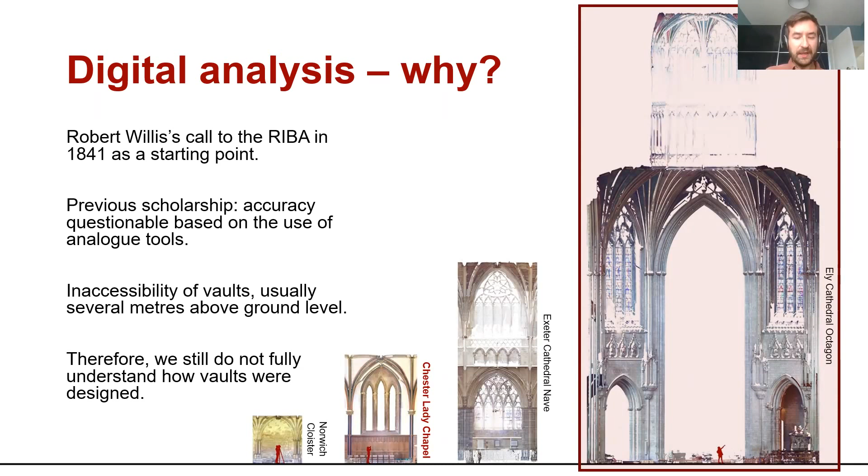So in short, 180 years after Robert Willis gave his speech to the RIBA, we still don't fully understand how medieval vaults were designed. But now we have highly accurate digital methods of surveying vaults, and digital modeling techniques to analyze them. We can hopefully find out a lot more than he did. I'll now hand over to Alex, who can give us a bit more background.

Thanks, Nick. So Chester, just to give you a bit more background about the cathedral. I'm sure some of you are very familiar with it, but we've got people from abroad who may not be. It starts off as an Anglo-Saxon church, refounded around the 1090s by Hugh I, Earl of Chester, as a Benedictine abbey, and rebuilt in the usual east to west sequence, with the west front apparently complete by around the 1160s. A few parts of this Norman building survive: the lower levels of the north transept and the northwest tower, and the west range of the cloister, which includes a groin-vaulted undercroft and a rib-vaulted abbot's passage.

From the mid-13th century, the monastic buildings in the east range of the cloister were rebuilt, including a new chapter house, which had lancet windows and tierceron vaults. Work then started on an extensive reconstruction of the church's east end, starting with the Lady Chapel, with windows and vaults very similar to those in the chapter house, but bar tracery in the piscina, the holy water vessel washing space, providing a dating after 1250. We don't get tracery before that date in this country.

The choir followed from around 1270, but construction was visibly prolonged. If you look at the cathedral, you can see how many changes are introduced and disrupted, and it's only described as being complete in 1332. Major 19th century restorations include the current wooden vault. In 1332, funding was obtained to rebuild the nave and the bell tower, but work didn't proceed beyond the east bays of the south aisle.

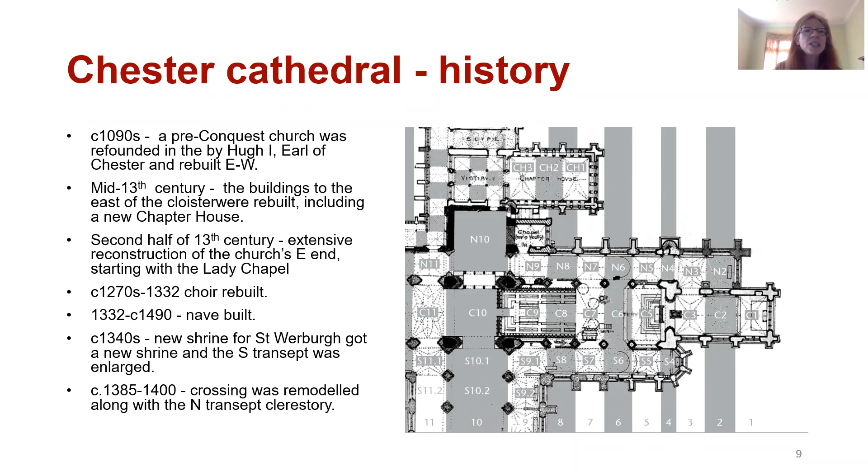Looking at this history, you can see there's a lot of complications, and we wanted to know what our data could add to understanding of the church. We had a number of research questions. The chapter house, the Lady Chapel, and the Slype all have vaults with similar plans, so we wanted to know whether they shared geometries in 2 or 3 dimensions. Then we wanted to know how the design of these vaults related to other 13th and 14th century vault designs.

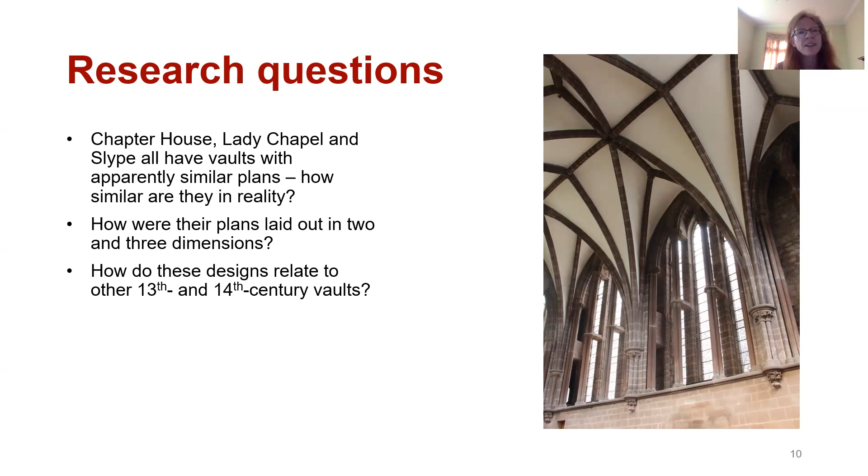But first of all, we needed to decide how we would capture the data we needed to answer these questions. I'll hand back to Nick for this part.

So we investigated 3 different methods of digitally surveying the vaults, and Chester really was a place for experimentation, being the first place that we visited.

So the first of the 3 that we looked at was total station. The way total station works is you look through a viewfinder, and guided by a laser, you pick a point in space that you want to capture, then you press the side of the device, and you have an XYZ coordinate in space. You repeat this process. So for us, tracing along rib intrados lines, we follow along with a laser and pick all those points out, and we end up with something like you see in the center here - a dot-to-dot version of the chapter house at Chester.

So the advantages of total station: it's precise and selective, i.e. you're only seeing the parts of these points that you decide to select. But this is also a disadvantage, because if you want to record other elements, for example rib profiles or the webbing, you need to do a separate campaign of recording. Another disadvantage is the scanning times are long - a bay at Chester took us nearly 2 hours.

Finally, the scans that we produce using total stations aren't in color, and they only show these individual points. So because of these limitations, we decided to abandon total station and look instead at full laser scanning.

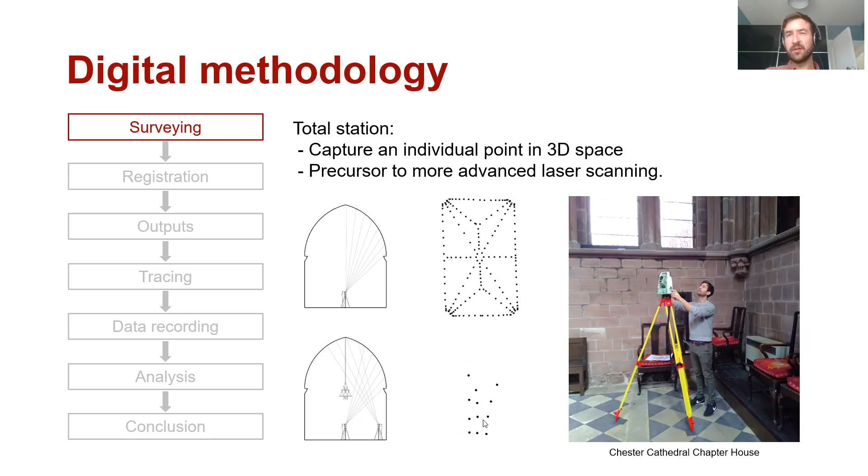But there is a third method that we investigated, which is called photogrammetry. The way photogrammetry works is you take hundreds of photos using a digital camera from as many different angles as possible to ensure that all different data and all details are captured.

So you can see this is JR, our technician. He's taking photographs for photogrammetry in the choir aisle at Wells. And if you look carefully at the bottom, he's being watched over by the cathedral cat.

Once you have all the photographs taken inside the cathedral, you put it into a piece of software called Agisoft Metashape. This can work out the perspective of where the images were taken from, and it figures out their position in three-dimensional space. What it results in is, again, a point cloud model.

This can also, like laser scanning, be exported as orthographic representations, as well as 3D point clouds and 3D mesh models. So what are the advantages of photogrammetry?

Well, it's inexpensive because you can do it with your own digital camera, or it could even be done using a smartphone in certain circumstances. And the software is only about £500. Also, you get some very high quality images out of it, and we'll talk more about that over the next few slides. Likewise, as a disadvantage, sometimes we found that the quality of the 3D data isn't as good as laser scanning. So we'll touch on that now.

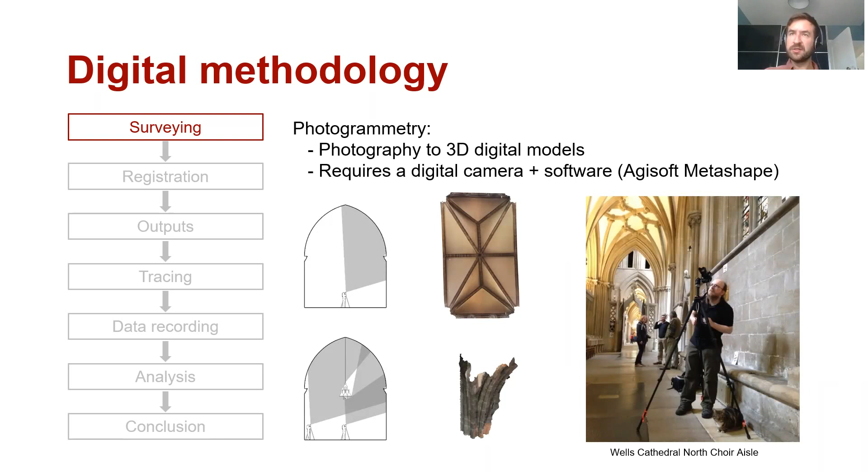Here you can see this is the photogrammetry version of it, and the quality of the image is beautiful.

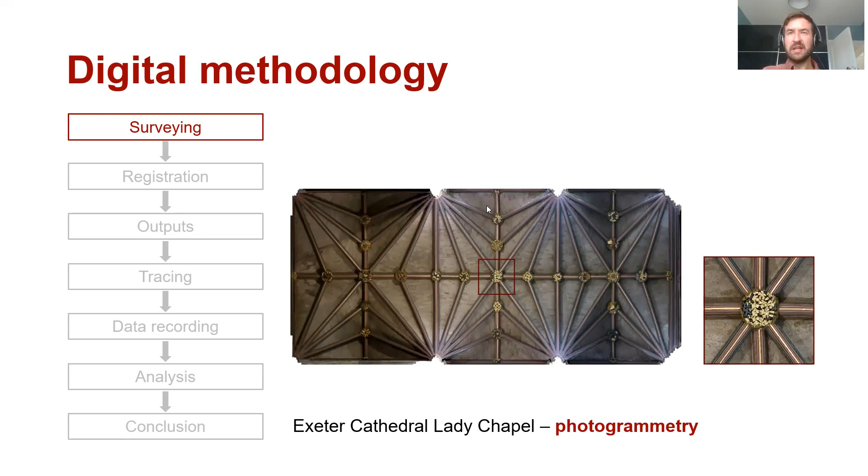It's much better if we flick back to the laser scan version. If we compare again, photogrammetry gives much better quality image, and the geometry looked good as well.

However, when we start to look at our areas of interest, which are predominantly the vaults high above us, we start to see some issues with photogrammetry. If we look at the top left two images, with the laser scan data, looking at the ribs high above us, if we take a cut through them, we still get a pretty good record of that rib profile. Whereas the quality really starts to deteriorate when we compare it with photogrammetry.

Therefore, moving forwards, we chose laser scanning as our primary method to survey all of our sites.

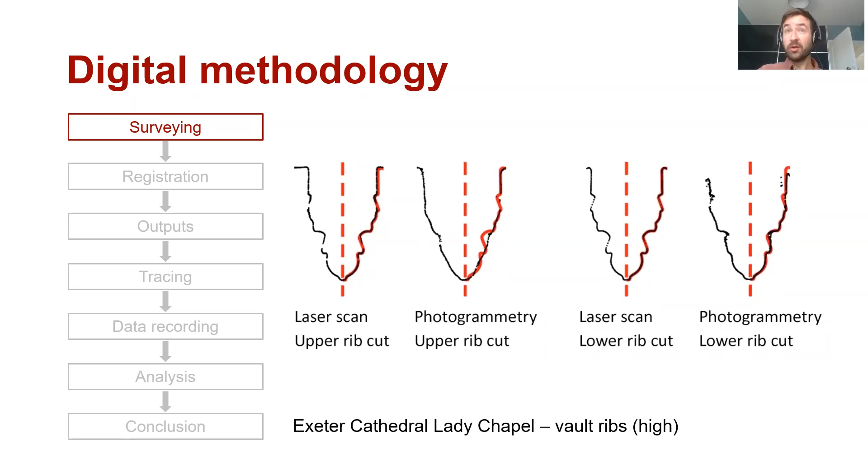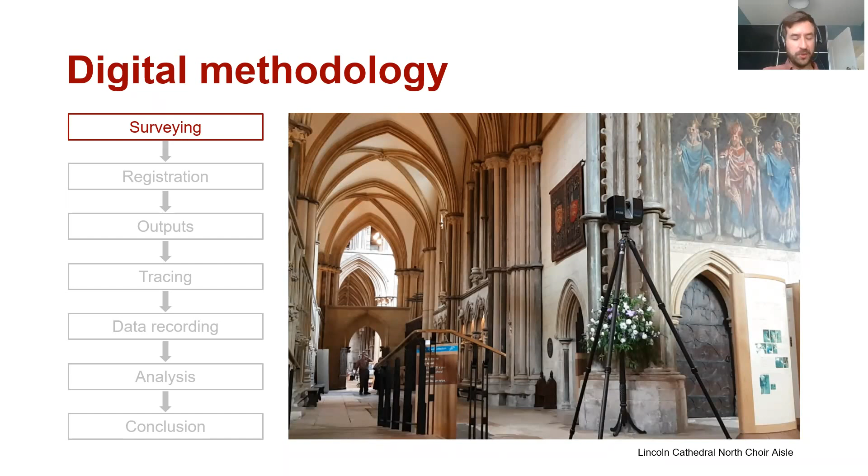Once we have those laser scans, we have to record more than one. I should have mentioned that previously: it works on line of sight. All of these methods - total station, photogrammetry, laser scanning - they all work on line of sight. So if the scanner cannot see the target, it will not record it. What we need to do is create a series of scans that overlap, and we tend to take one scan per bay for most sites.

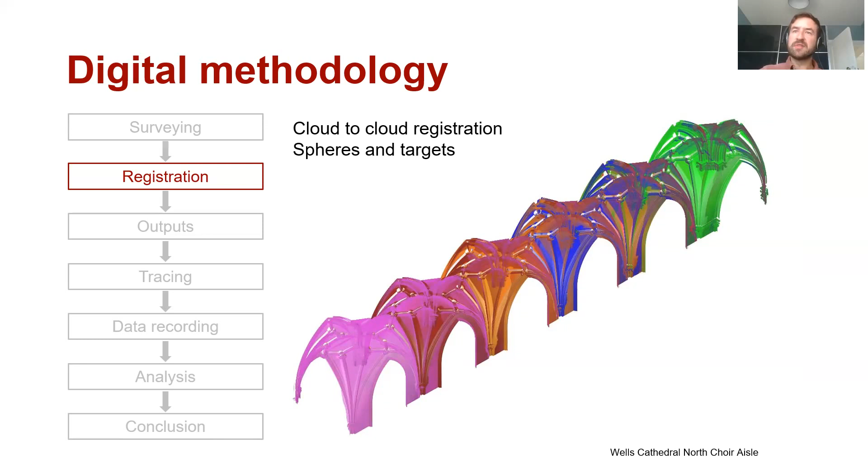We have to register the scans, which means we need to align them. When they come into the software, they could be anywhere in space. The way the software does that is it either looks for targets which we put up in church and cathedral interiors - these are either checkerboards or they look like giant ping pong balls. The software recognizes these and triangulates in three-dimensional space how the different scans align. More recently, with updates in the software, it can actually look at the different scans and recognize geometry amongst them and align automatically. So the software is getting better all the time.

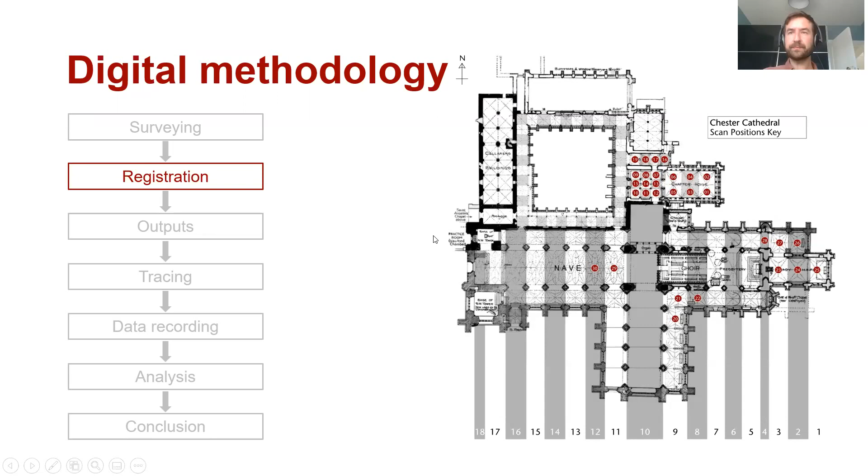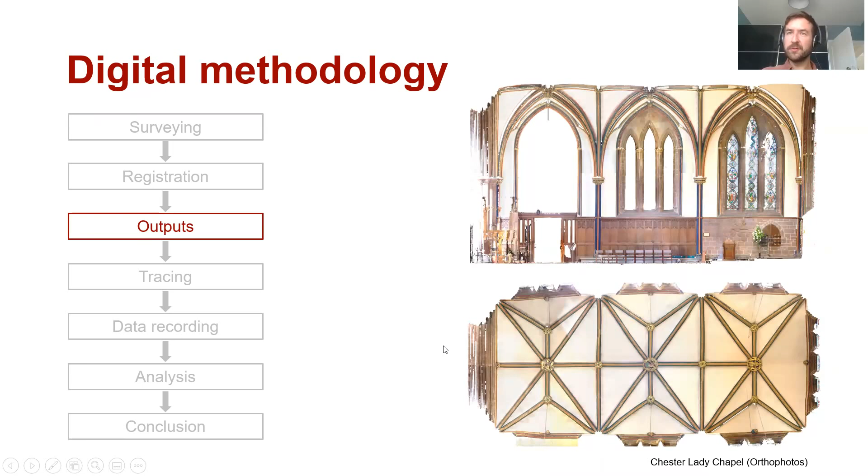So here are some of the outputs. This is a couple of ortho photos - ortho photos is where all of the perspective is removed from the image, so it's the equivalent of an architectural plan and section. We can start to interrogate this and work out what's going on with the geometry. If we look at the plan view of the Lady Chapel of Chester at the bottom, we get these snaking ribs - they're not going in a straight line, which was quite problematic for us. You can see the left-hand bay here, how much the walls are distorted and moving inwards. So we have ortho photos that allow us to start looking at what's going on.

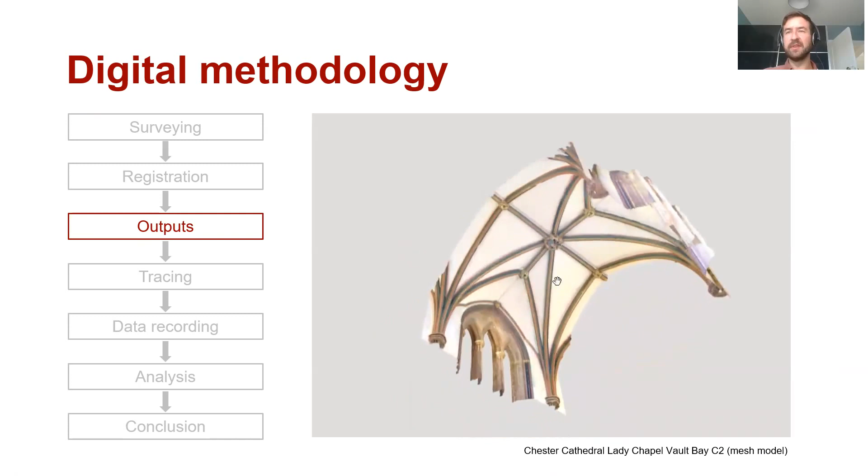And we have the 3D models. This is one of the mesh models, and we can start to then rotate and navigate around that to see what's going on. We'll just zoom in here so that you get a sense of how a mesh model works.

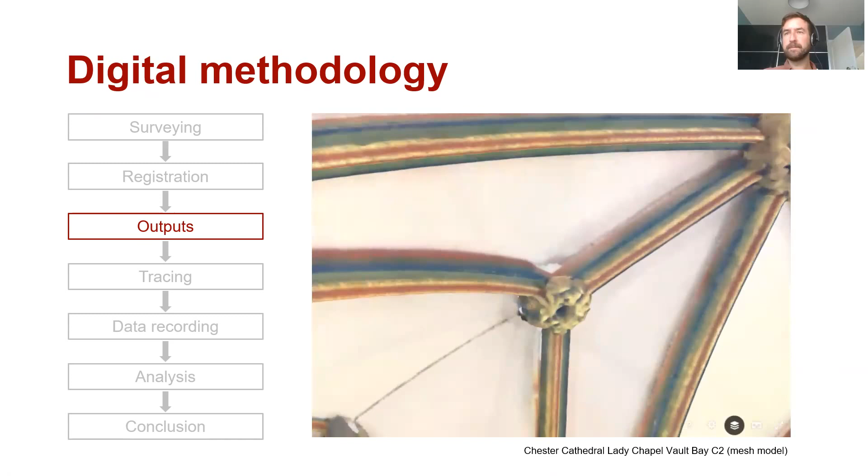So I'm just changing the view to show all the mesh. These are all the points of the point cloud which have been joined together to form triangles, and that gives us surfaces.

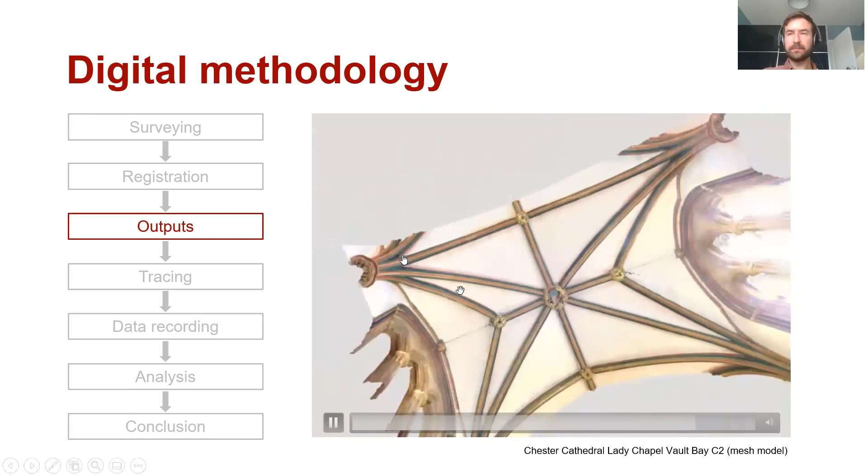Okay, so now we've got all of the data that we need to start with our tracing process. What we're primarily looking at is the intrados line of each vault rib. The intrados line is the innermost edge of the stonework. This is a really important point because you would have needed centering made out of timber.

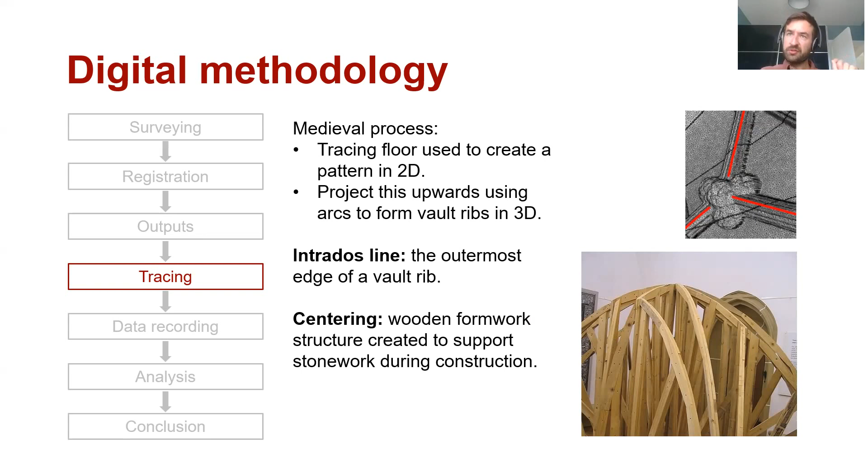You put that centering or formwork up when constructing the vault, and then over the top of that timber centering you can put in the stonework. Once it's all in place, you knock out the centering and hope that the stone above stays in place. So this would have been the critical junction where the timber and the stonework meet. In the stonework, it's what we call the intrados line, the outermost edge of the rib. So for us, it's really important that we trace along that to try and understand the geometry.

Here you can see this is an example of one of the choir aisles at Wells, and you can see where we've traced over all of those intrados lines on the 3D model in the center. From that, we can start to export some 2D views.

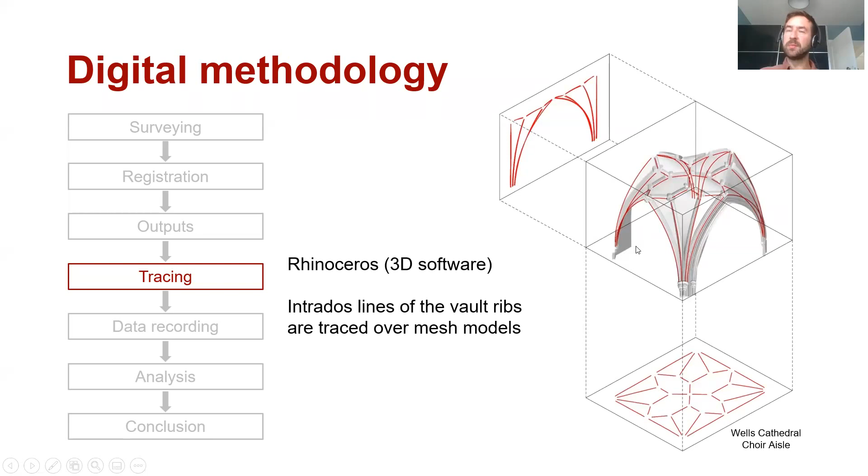But starting to get into the key geometry that we need to look at, we take the traced lines, which are not true geometry, because as I mentioned before, they tend to snake a little bit. So the first thing we do is run a best fit arc through that, and I'll explain further in the next video. But the key geometry we're looking at once we do have a best fit arc is firstly the impost line.

This is the point on which the springing point of a rib appears to rest, and it's usually the abacus of a capital in medieval vaults.

The next point is the apex, which is notional, because there tends to be a boss stone that covers it.

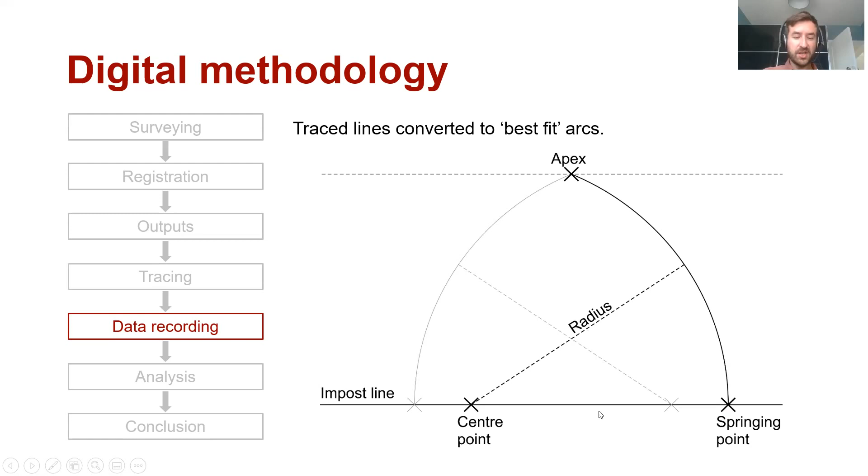Next, we need to look at the radius of each rib, and in some cases there are multiple radii for a single rib. Finally, we look at the center point of that arc in relation to the impost line. We'll repeat this in a few slides' time because it's quite fundamental.

I'll just finish this section by showing a video of us tracing over one of the ribs at the North Choir Aisle at Ely.

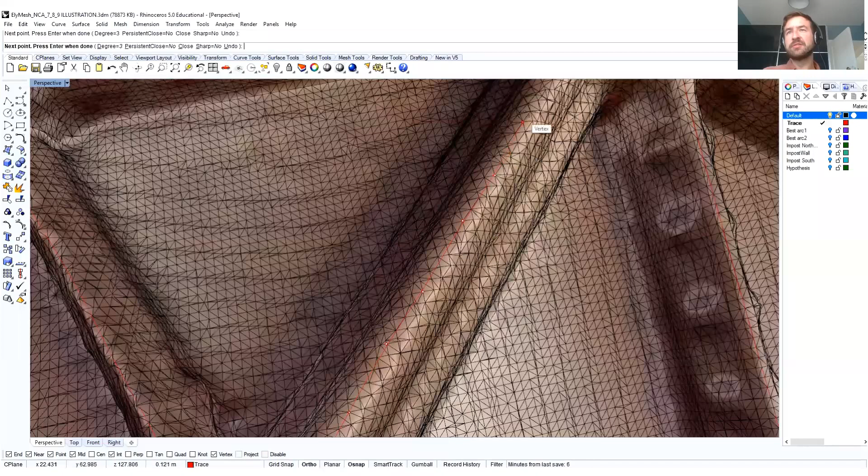This was a previous method we used and sometimes still have to use, where we're doing it by hand. We're going into the mesh model and trying to pick out the points along the intrados line. You can see that happening here.

More recently, we use an automated process where we can tell the software to create a section along that intrados line.

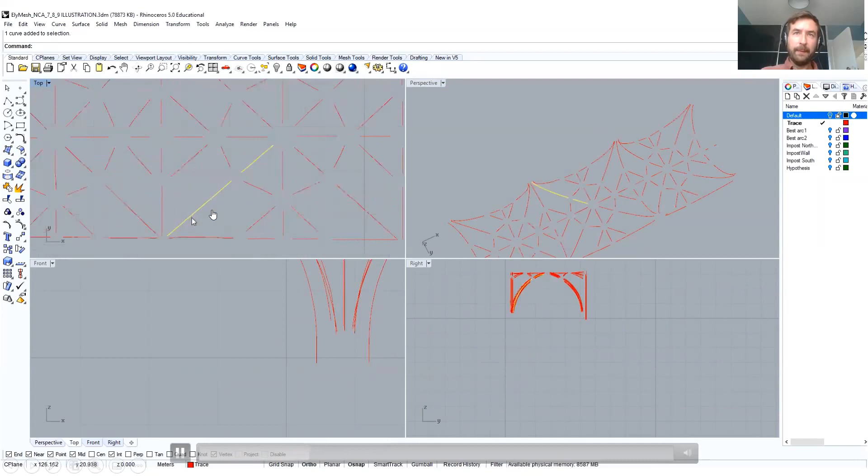So here you can see, Blue Peter moment, all the ones we've done previously—here's one I made earlier. But we can then start to pick out the individual ribs and we highlight them.

So I'm just asking the software to switch on the underlying points.

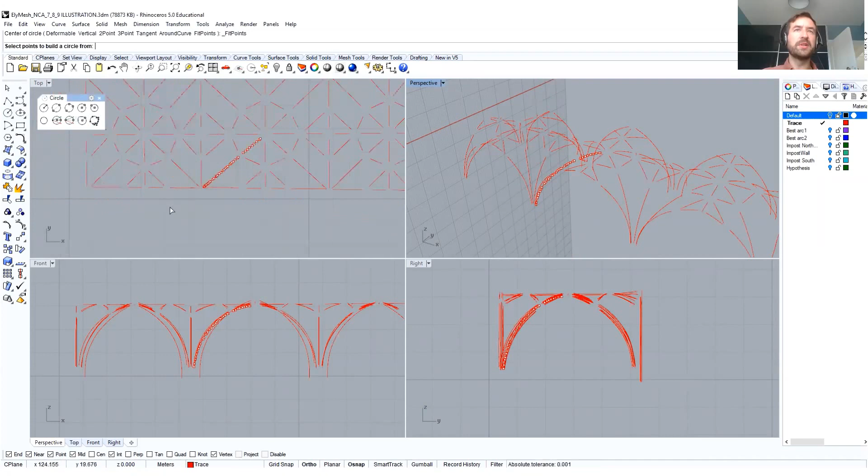And then we use one of the tools in the software, which is a circle fit through points, and it automatically creates that best fit arc through the traced lines. You can see that now shown as a purple circle.

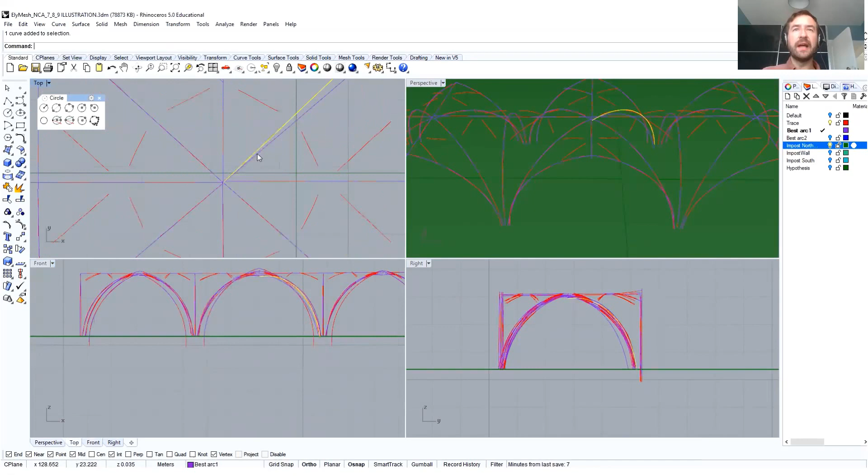So the next thing we need to do is tidy it up. The green line, which I'll now highlight in yellow, that's the impost line we spoke about before. We can trim that arc below the impost line, and then at the notional apex, we can start to trim that down too.

So now we have that best fit arc, and another Blue Peter moment: here are all the other ones that we've prepared.

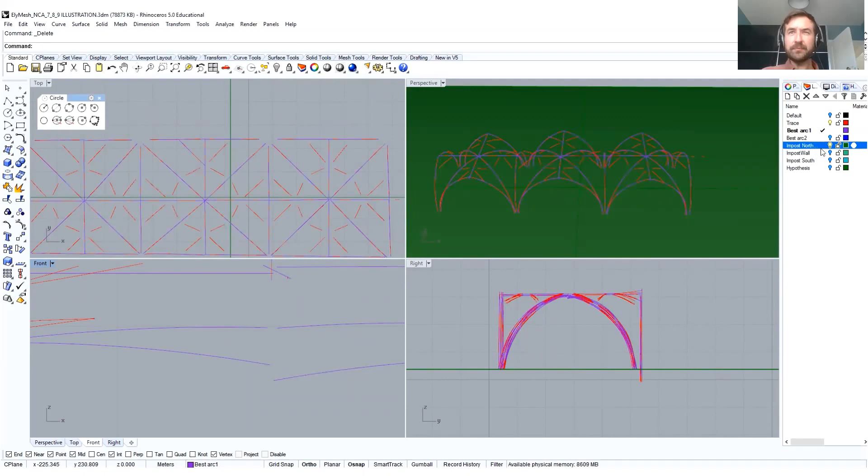We now have all the data we need to extract into a data table. The first thing we do is ask the software, what is the radius of this rib? It's about 3.5 meters. We then copy and paste that into our Excel spreadsheet.

In this spreadsheet we're recording every single rib, looking specifically at the radius, the apex height, and the center of the rib in relation to the impost line. Here you can see recording the center of the arc relative to the impost line - this one's quite far below, quite a rare occurrence.

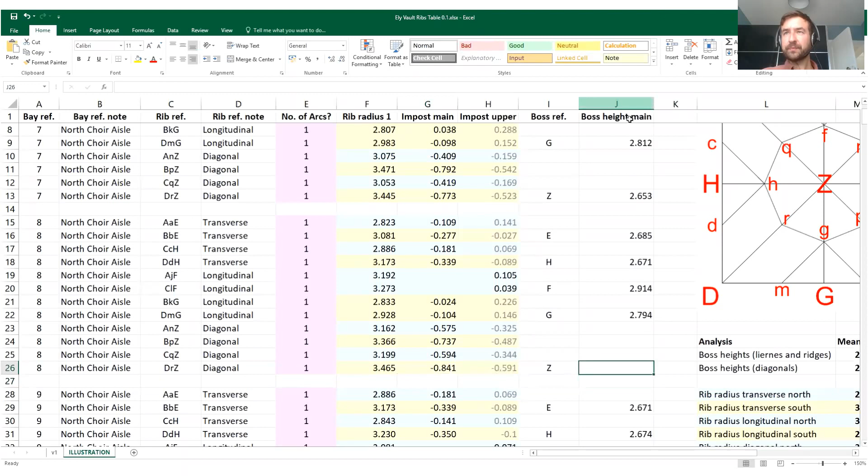So we put that into the table, and finally we go back in and find the missing notional apex. Hopefully that gives you an overview of the process we go through. Now I'll hand back to Alex, and she can tell us a little more about some of our analysis.

Thanks, Nick. But before we do that, let's look at the anatomy of a vault so we can all know what we're looking at. A Gothic vault has two main elements: the webs and the ribs.

The ribs are the mouldings, which usually mark changes in plane of the webs, but could also decorate planar surfaces. The ribs were built first as a framework, and the webs added afterwards, but both elements are equally important to the structure of the vault.

Medieval vaults are not like modern steel frameworks infilled with non-load-bearing panels. The starting point of a rib, as Nick said, is called the springing, and the top is called its apex. At the apex, where a rib meets another rib, there is usually a sculpted boss.

Architectural historians have given ribs different names based on their location. The wall ribs mark the junction with the wall, and transverse ribs span between the side walls, marking the division between bays. A bay is a compartment of vaulting.

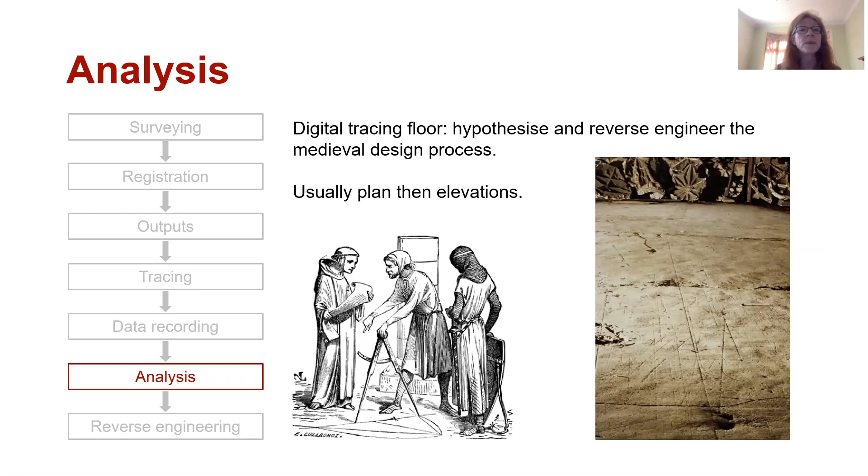From our data, we can create absolutely accurate 2-dimensional representations of the vault, from which we can start to hypothesize the process used to draw out the plan on the tracing floor.

We know that the drawing tools available to medieval designers were limited. The main tool was a set of dividers or compasses from which they could create curves. They also had squares for creating angles and straight edges for drawing straight lines. Therefore, any design process we suggest has to be possible using only these basic technologies.

In our workshop in 3 weeks' time, we'll show you in more detail how to use these basic tools to lay out a medieval vault. So what we're sharing today will just be a quick taster.

As a reminder, the chapter house at Chester was rebuilt in around 1240 to 1250.

It was part of the monastic buildings used for daily meetings of the monks, at which a chapter of the Rule of St. Benedict was read, hence the name chapter house.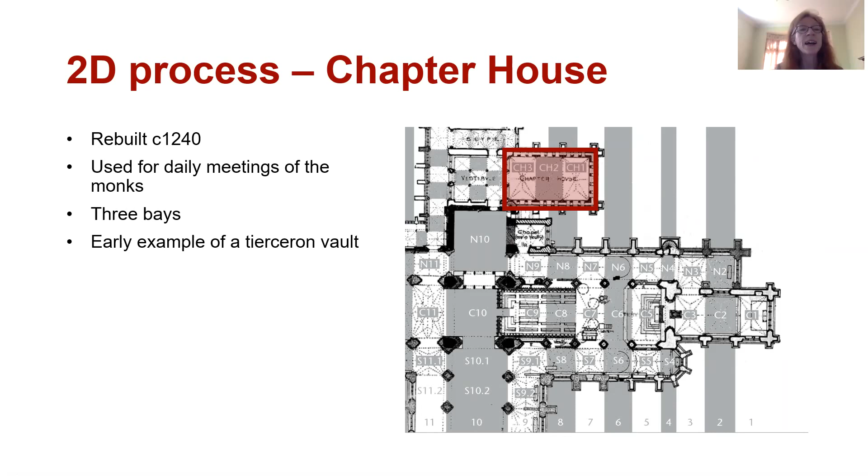Here's a plan of the building as an ortho photo, so you can see the 3 bays and the plan with diagonal ribs, ridge ribs, and tiercerons. And here's the overlay with our traced lines.

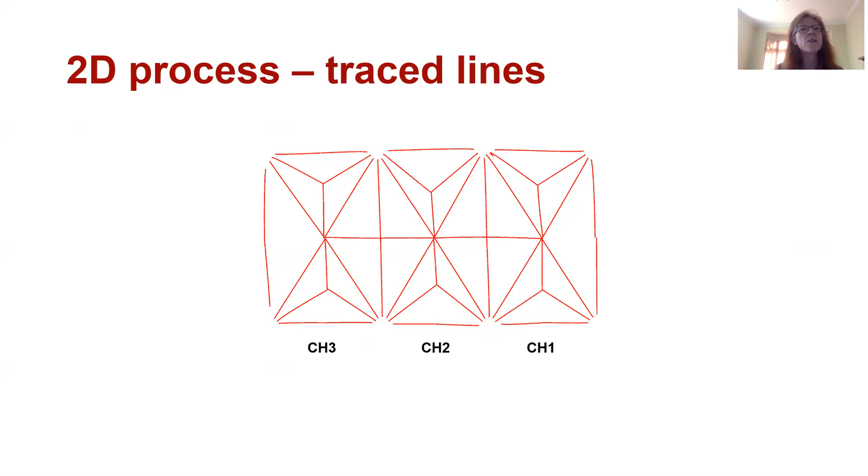As you can see from our wireframe plan, the construction of Chester was fairly rough, although we don't think the inconsistencies we found are the result of subsidence, rather that the building wasn't erected to exact standards of geometrical accuracy in the first place.

When planning a vault, the first stage was to lay out the plan of a single bay. This had already been erected when the vault was being built. At Chester, the central bay of the chapter house seems to have been laid out, as we'll talk through now.

First stage, laying out the bay. Then the diagonals were added. The next stage was to divide the bay into quarters, giving the location of the ridge ribs.

Creating chevrons in either direction creates what's been called the starcut, which our research has identified as a key design tool for medieval architects. We found the starcut in use at other sites.

Its benefit was that it enabled a design to be transferred between bays using proportions rather than measurements. This was vital because, as we've already explained in relation to Chester, medieval churches were rarely constructed to the same accuracy as our scans, so any design had to be sufficiently flexible to be applied to bays of slightly different sizes. In the absence of accurate numerical measuring devices, using proportions would have been much simpler.

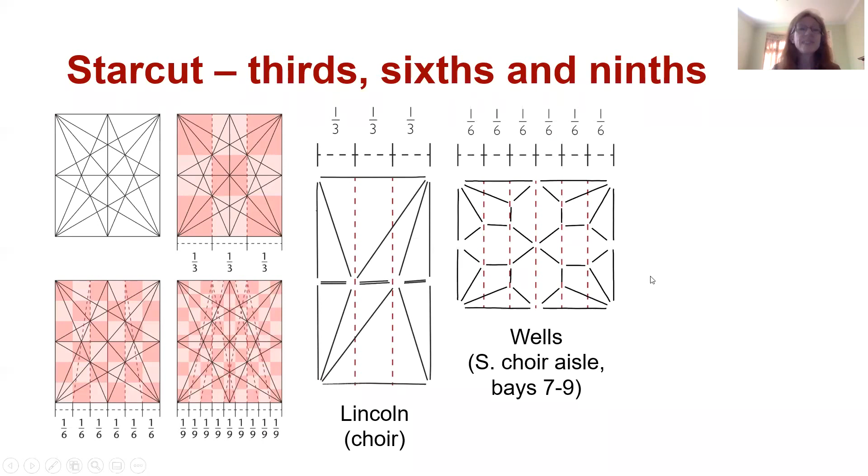The starcut could be used to divide a four-sided bay into any fractional proportion, up to 100ths. So far we've found thirds at Lincoln Cathedral, sixths at Wells Cathedral, ninths at Exeter Cathedral, as well as fifths, again at Lincoln, sevenths at Wells, and 13ths at Ely.

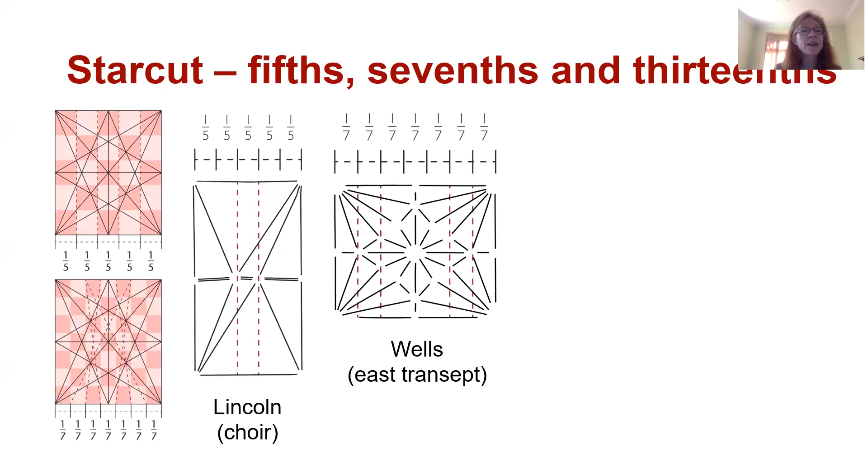Intersections of lines drawn in this way establish the position of all the bosses and the location of all the ribs. We then overlay our hypothesis over our original trace data to check their conformity. We're pretty confident that this represents a good match.

However, if we overlay the same design on the trace design of the end bays of the chapter house, there's a clear discrepancy. We carried out the same process for the Lady Chapel, whose design we'll be exploring in our workshop in 3 weeks' time.

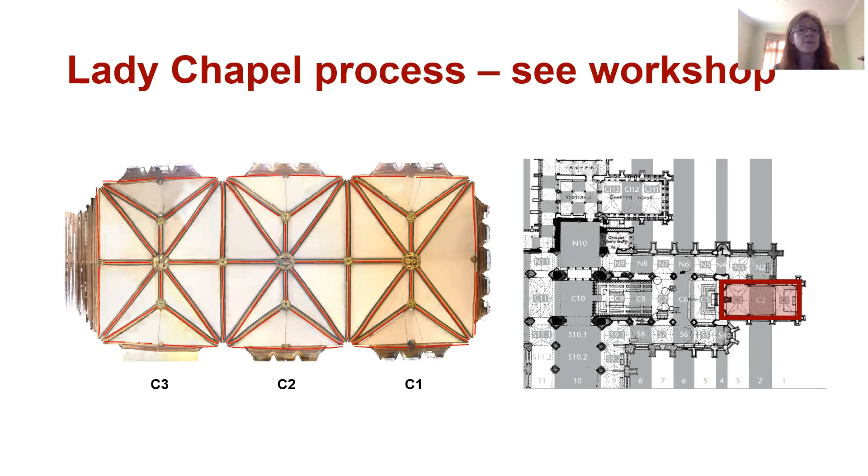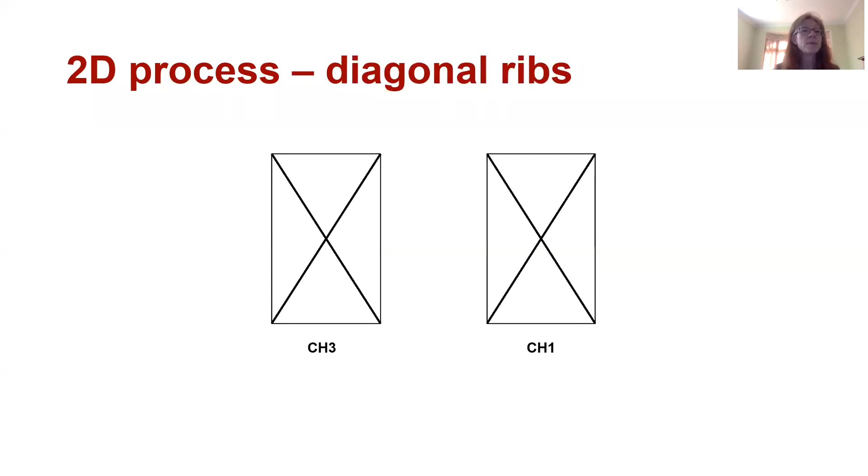We then looked again at the end bays of the chapter house. Again, the first stage was to lay out the plan of the bay. Then we add the diagonal ribs. Then we divide the bay into quarters to locate the ridge ribs. Finally, we needed to locate the intersection of the tiercerons with the ridge rib.

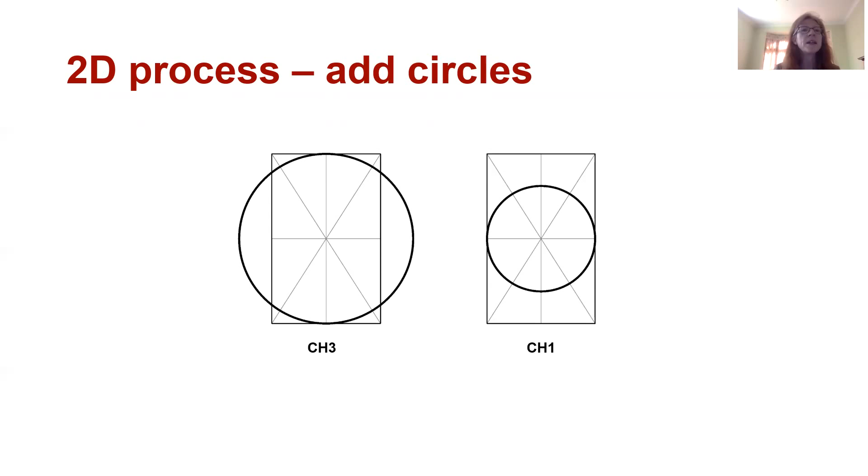We found that this could have been done in one of two ways, using circles with the diameter of either the length or the width of the bay. Using this circle to construct chevrons locates the apex of the tiercerons.

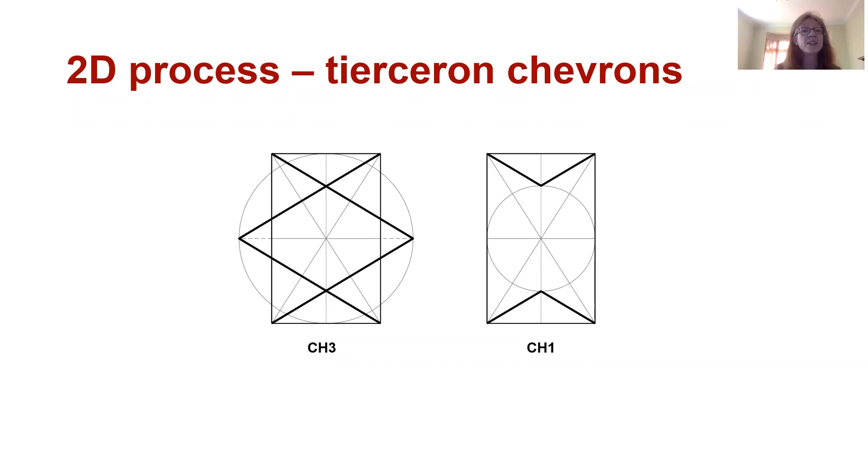The version on the left of the slide is a basic form of what we've called the inner circle star cut. The use of the star cut and its variants places the design process used at Chester within the mainstream of medieval geometrical design practices.

We found the inner circle star cut in use at Wells and Ely, for example. However, the use of circle star cuts also reveals greater creativity in the Chester designs than had previously been identified. We found fewer examples of circles whose diameter is the width of the bay, but a variant of what we've identified as the possible method at Chester is used in the end chapel of the north transept at St Mary's Church in Nantwich.

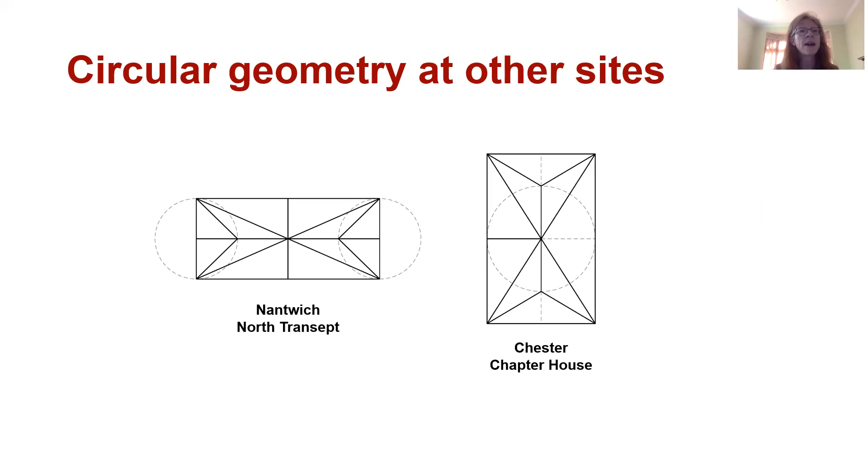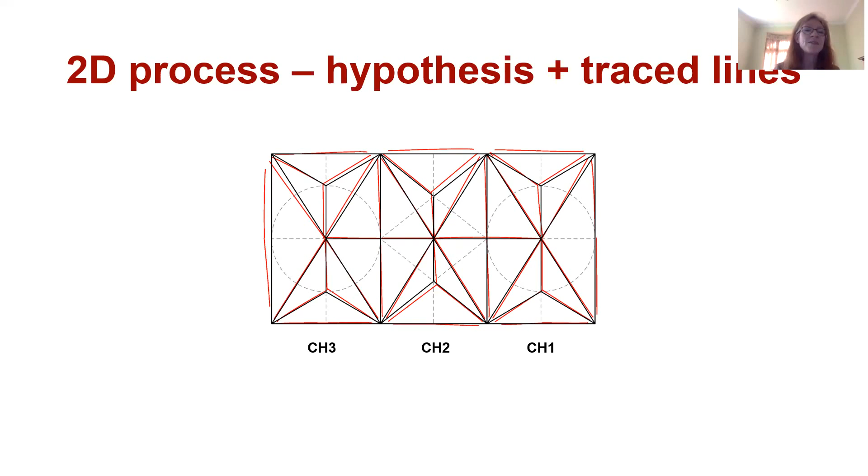Once the two-dimensional design had been established, the designer had to work out how to make it three-dimensional. And I'll hand over to Nick to explain further.

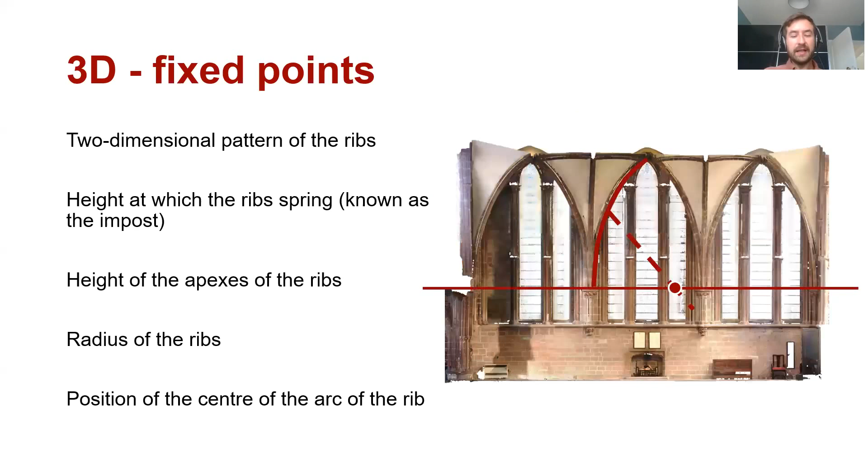When interrogating the design processes involved, we work from the basic principle that the 3D form of the vaults at this period is dependent on 5 different factors: the two-dimensional plan of the ribs, the height at which these ribs spring, known as the impost, the height of the apexes of the ribs, the radius of the ribs, and the position of the center of the arc of the rib in relation to the impost level.

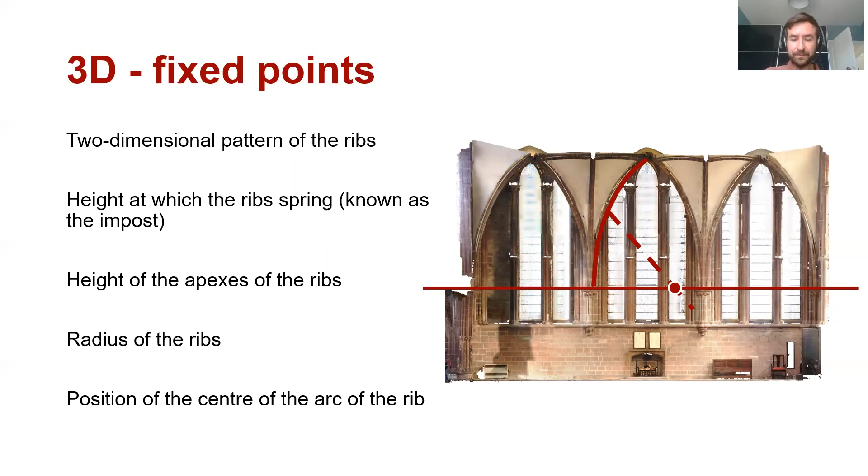Each of these factors could be used as a starting point, which limits the options available for the others. Once you have 4 out of 5 fixed, the 5th one automatically follows. And some of these elements could be fixed by the pre-existing architecture.

Looking at the chapter house specifically, it seems likely that the height of the apex of the diagonal, transverse, and tierceron ribs was fixed, as these are the same height throughout. This could be based on a 2-to-1 ratio, i.e. 2 stacked squares, but we're not 100% certain about this.

However, this isn't the case for the wall ribs to the east and west, which have a higher apex. In terms of fixed elements then, all the ribs appear to have their arc centers on the impost line also.

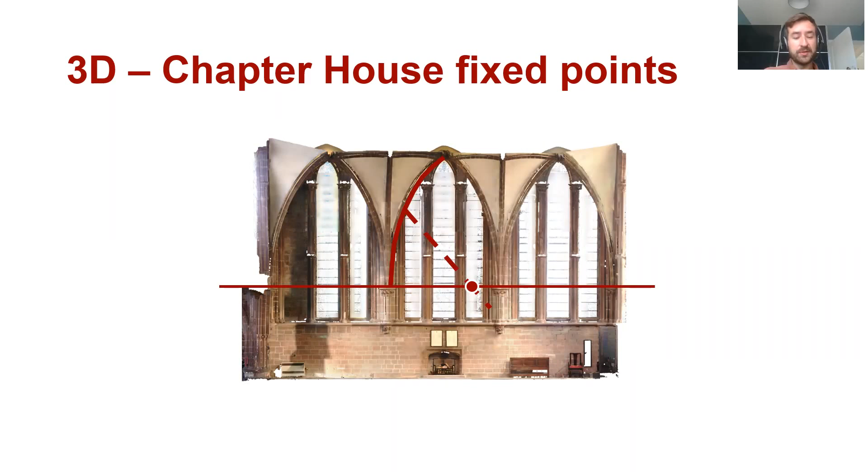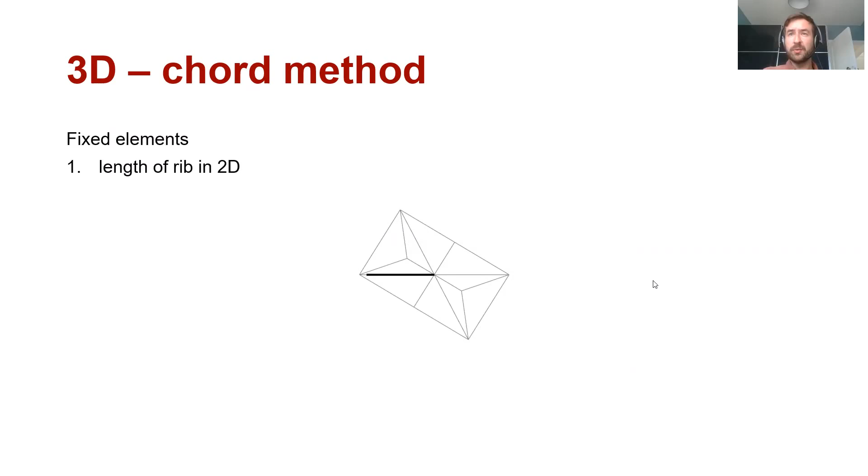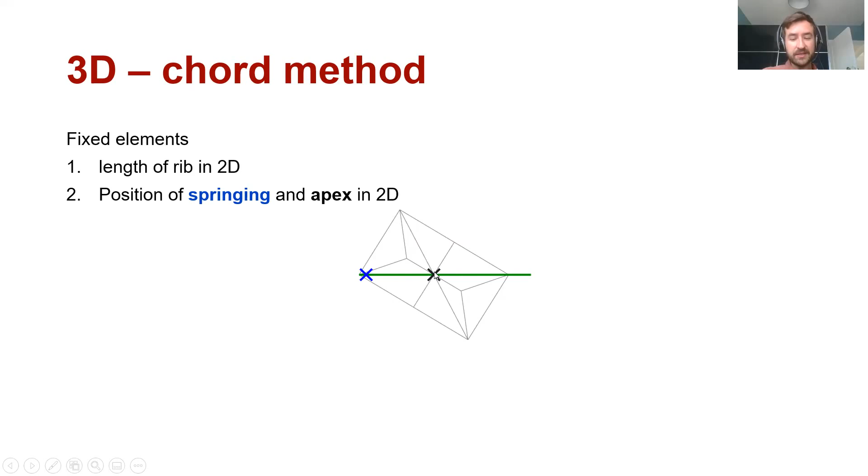For all of the ribs other than the wall ribs, therefore, the known elements are as follows. We have the length of the rib in 2D, so we can see the highlighted black line, the location of the plan and the springing, and the location on the plan of the springing and the apex. So we have a blue cross in plan showing the springing point and a black cross showing the apex. Now if we switch to an elevational view...

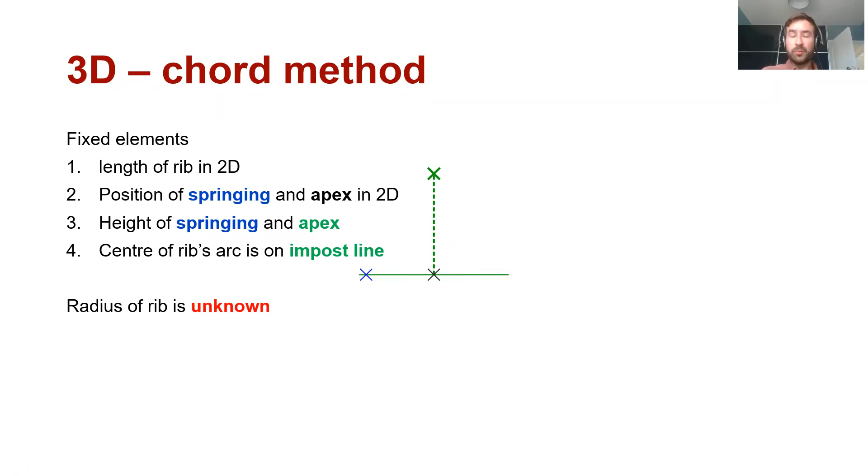Working from the known elements, we can find the missing radius by what we've termed the chord method. First, draw a line between the springing point and the apex. Then draw a line at a right angle to the first line halfway along its length. The point at which this line crosses the impost line is the position of the center. The distance between this point and the springing and the apex is the radius. So we can see now we've found the missing arc shown in red.

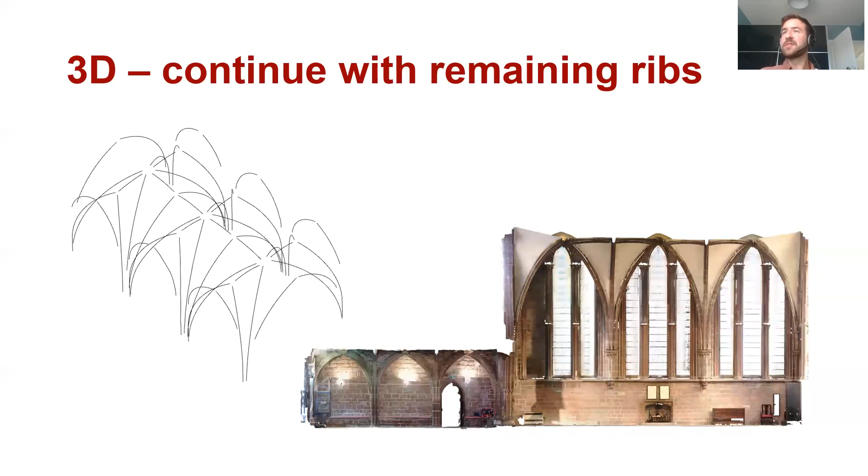And this is the process that's used for many of the ribs at Chester. We continue this process and hypothesize how it worked for every single rib. I'll hand back to Alex now for some further remarks. Thanks, Nick.

As we've already mentioned, the vaults at Chester show remarkable similarity in basic layout, specifically the omission of the last span of the ridge rib between the final boss and the end walls. We find this in the chapter house around 1240 to 50, the Lady Chapel around the 1270s or 80s, and the Slype in the 14th century. But there were nevertheless significant differences in their two-dimensional geometry and also their three-dimensional forms, which are revealing of wider trends in tierceron vault design.

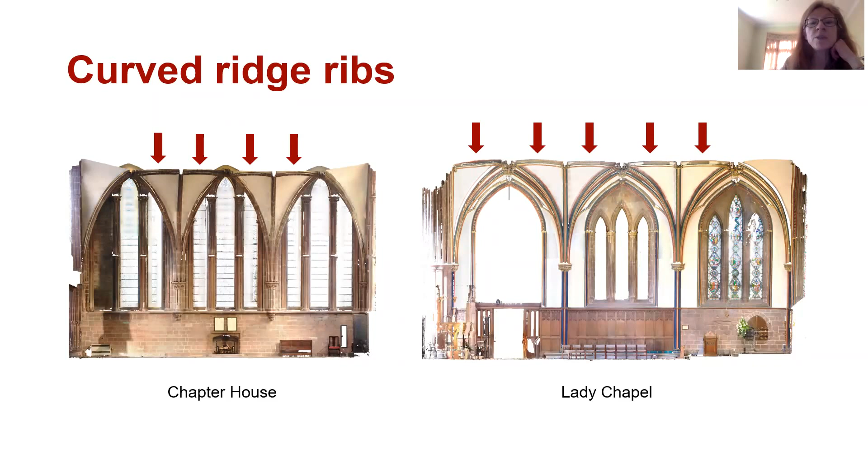If we look at the chapter house and the Lady Chapel, they both have ridge ribs which arc between the bosses, you see that? We find this at numerous other early tierceron vaults, for example at Lincoln Cathedral here - again you can see these curving ridge ribs. If you compare this with the Angel Choir at Lincoln, we've got flat ridge ribs there. So I think you can see the very clear difference between the earlier St Hugh's Choir and the later Angel Choir.

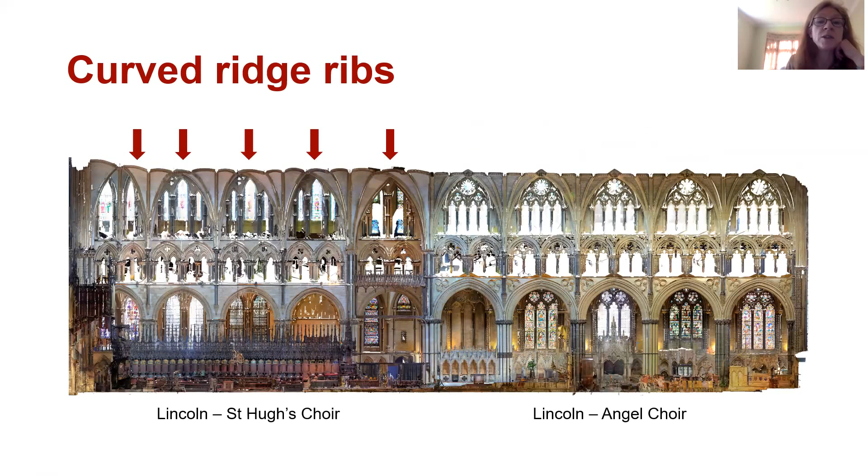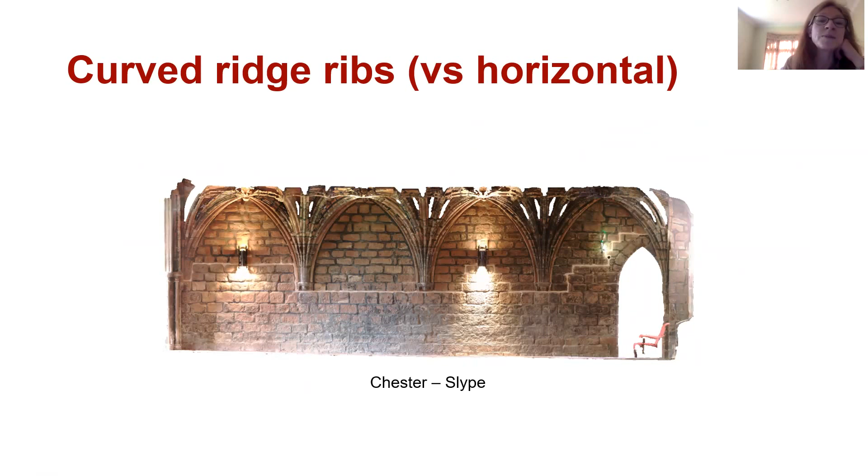If we move back to Chester from Lincoln, you can see that in the Slype, which is 14th century, we have this straight ridge line, which we don't find in the earlier vaults. We also find that the ridges in the chapter house rise up - we had the ridge ribs only go as far as the boss, and then we have an uncovered ridge line going to the windows. And in the Lady Chapel, it goes downwards towards the window.

Nick mentioned we had to take 2 scans in the chapter house per bay, and this is why: the vault, if you're standing in the middle, you don't see the whole of it. We had to take 2 scans because these vaults rose up towards the windows.

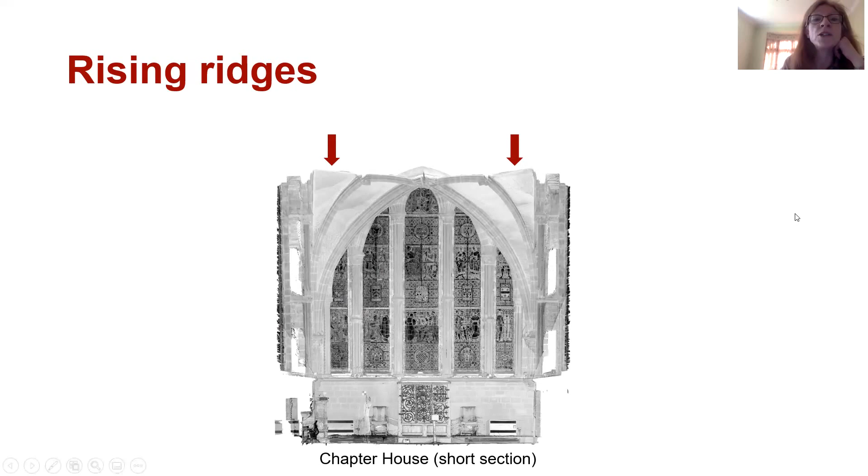If we go to the Lady Chapel, on the other hand, the ridges sink towards the windows, and the highest point is in the centre of the vault. Again, we find both of these features in other vaults.

This curving down, for example, we find in the presbytery at Ely Cathedral. So it's quite interesting to see the differences in three-dimensionality between these three vaults, which look similar in plan, but once we go into three dimensions, we see that they're quite different.

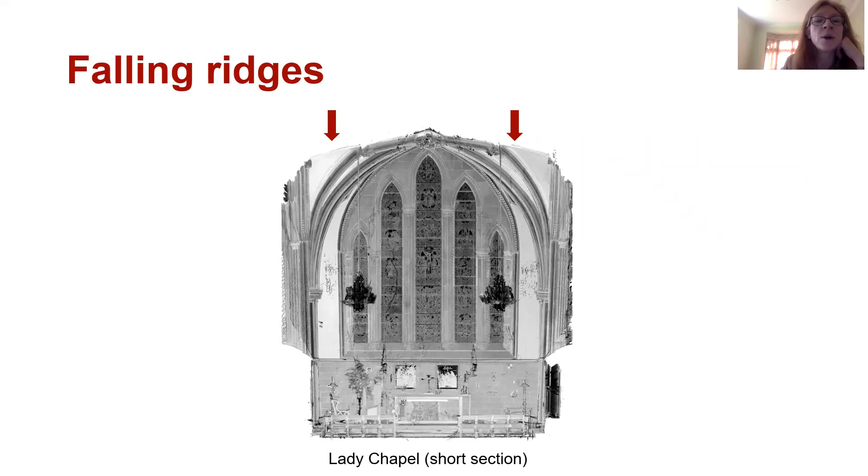Another of our findings was in relationship to the bosses. I mentioned that in all of these vaults, we don't have a rib between the final tierceron boss and the wall rib. But at Chester, it looks as though these were originally planned, because if we look closely at the bosses, we see a broken off stub of a rib that would have gone to the wall rib. And if we look at the wall rib, again, we see a broken off stub, which would have been the other end of this rib.

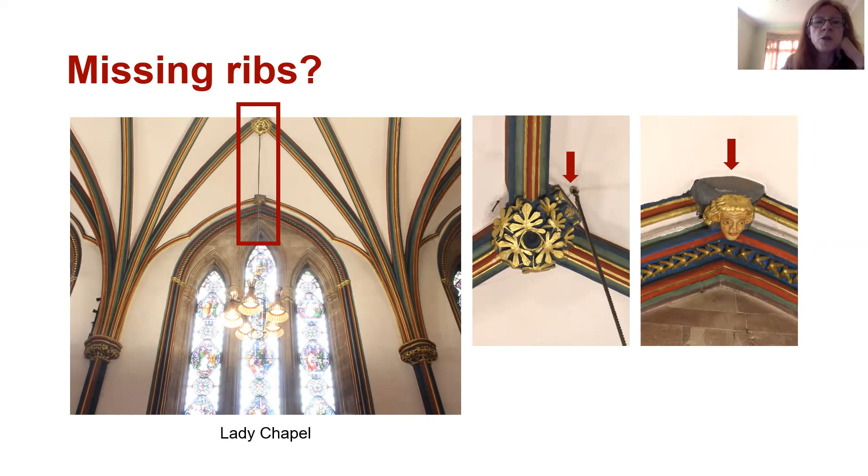We don't know why it wasn't filled in, or whether this is something that was taken out during restoration in the 19th century. This is one of the things we want to do more research on in the next phase of our project.

There are some other things we're looking forward to researching, maybe relating to the 19th century restoration. In the side aisles of the South Choir and the eastern chapels of the South Transept, there are remaining springer blocks from medieval work, which were then completed or rebuilt in the 19th century during restoration.

Nikolaus Pevsner was the first to point out that the geometry of the 19th century vaults entirely ignores these medieval starting points. So we want to see whether with our techniques we can reconstruct them as the original designs were intended rather than as they now are.

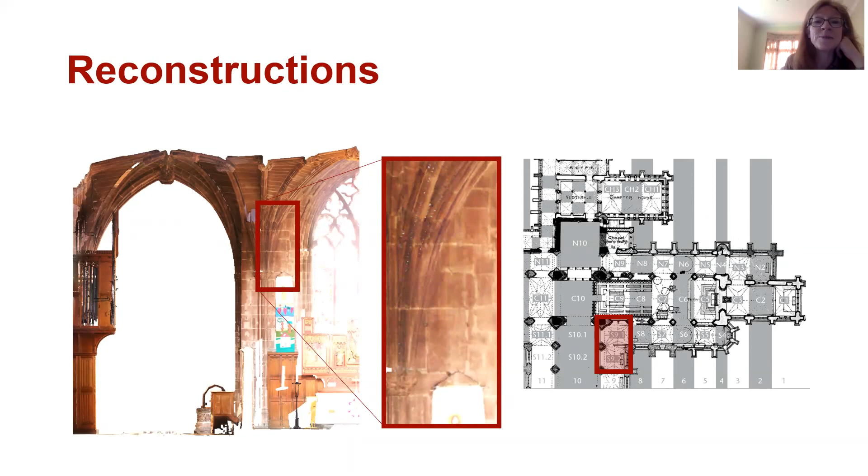That's one of the next stages of our project: to look at how these vaults might have been intended to be built rather than how they actually survive. So we've still got a lot of questions in relationship to Chester.